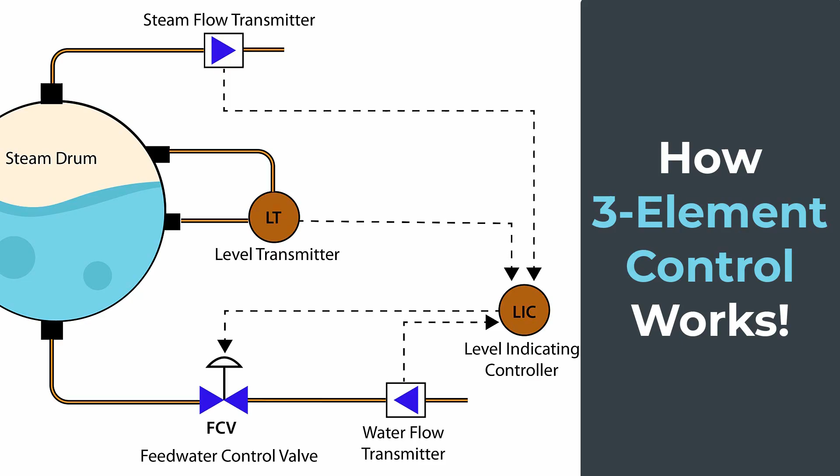In this video, we're going to be talking about three-element control and how we use it to regulate just how much feed water goes to our steam drum and correspondingly how much steam we're generating and discharging from the drum. It's going to be quite a short video because the concept is relatively basic. The idea is to give a brief overview of what three-element control is, why we need it, and how it works. We'll also discuss single element control and two-element control as a prelude to three-element control, and explain what swelling and shrinking, or shrinkage, means with reference to the boiler drum.

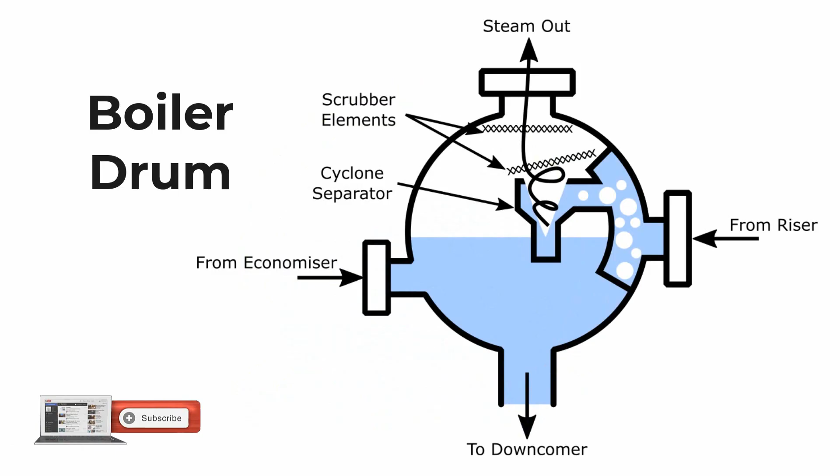Let's start by having a look at a boiler drum. We've got a totally separate video on the boiler drum, so be sure to check that out. It's a lot more detailed than what we're going to discuss right now, and it's definitely worth a watch.

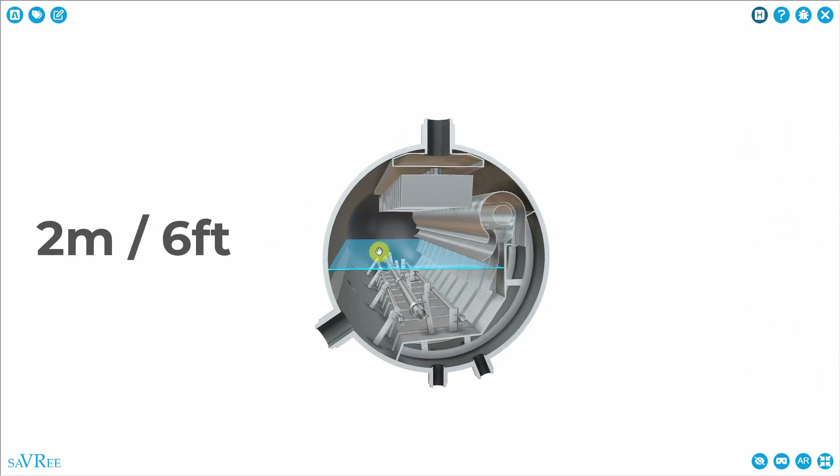Here is our steam boiler drum. I'll do a quick recap of the important bits relevant to this video. You can see that the steam drum is long and cylindrical in shape. It may be up to about 2 meters in diameter and up to about 30 meters in length. That's quite a large boiler steam drum.

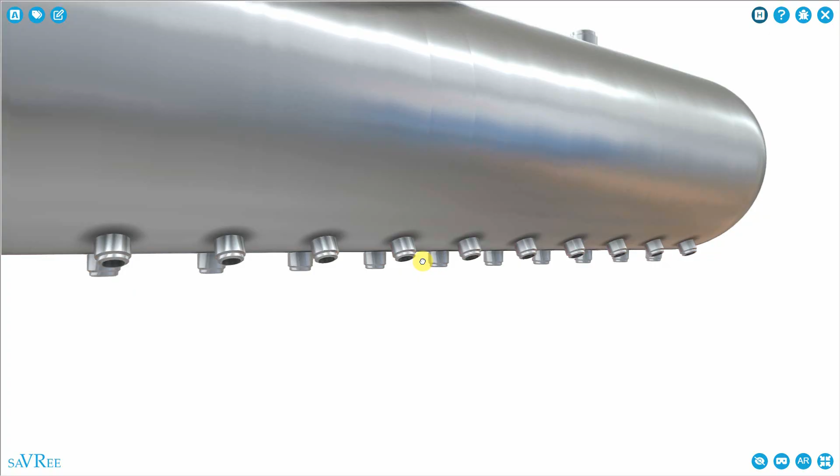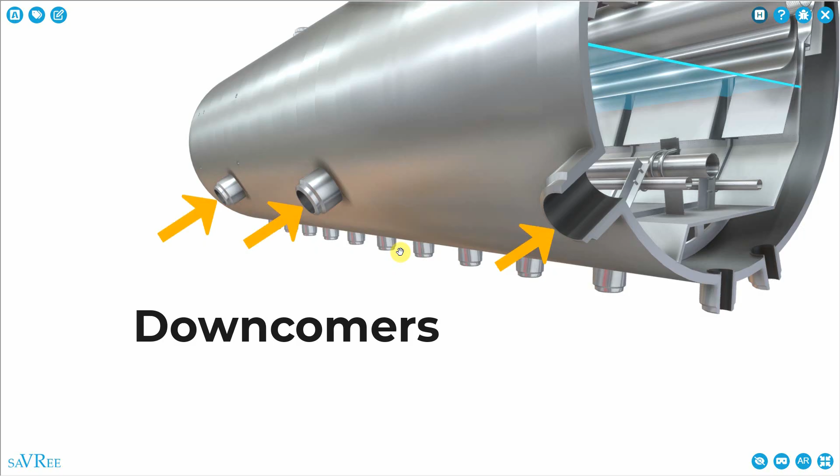We've got our steam discharges on top and our risers down below here. On the left side, we've got our downcomers. The downcomers distribute cold, or relatively cold, feed water to the boiler. That water will be heated up and then we'll get water and steam, a mixture of both, coming back up through these risers. We then separate the steam from the water in our steam drum and discharge the steam back to the boiler where it will be further heated, and we can then use that steam for driving a steam turbine.

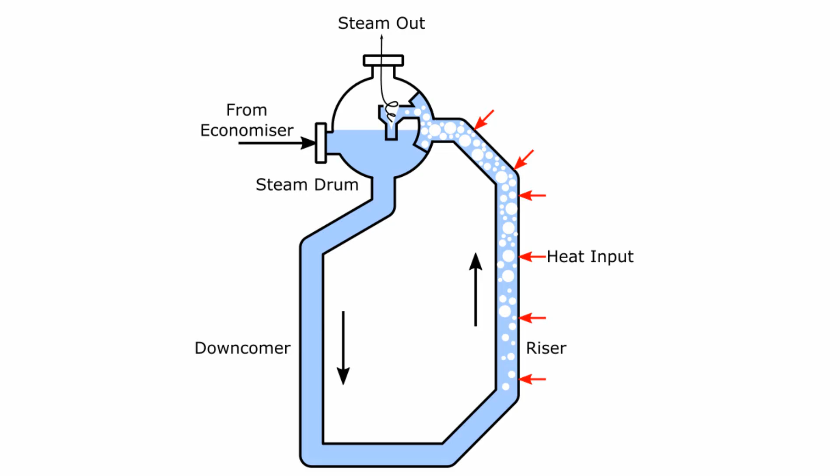That would be one application, but you can however use superheated steam for different applications, such as within a given process. The steam drum sits at the top of a water tube boiler. This one here is a water tube boiler that would be used within a power station. The steam drum is located at the top over here.

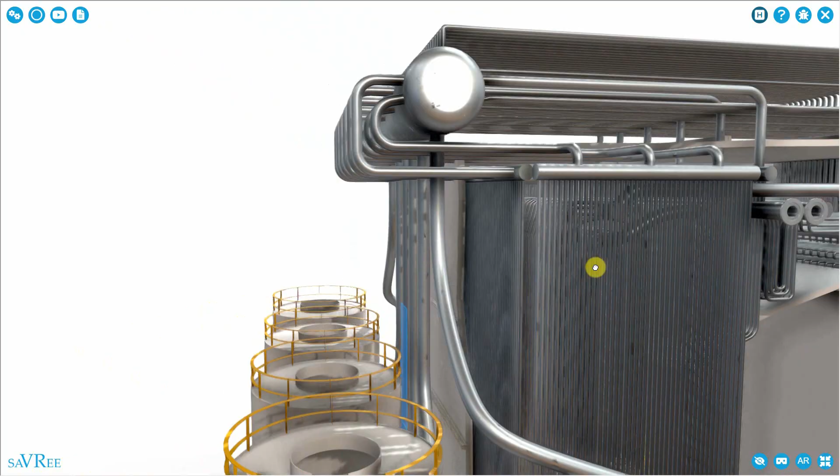This design is different from the one we've just seen. The downcomers literally come directly out of the bottom of the steam drum, and they'll go off to our furnace walls, to the boiler, and then the risers will come back here.

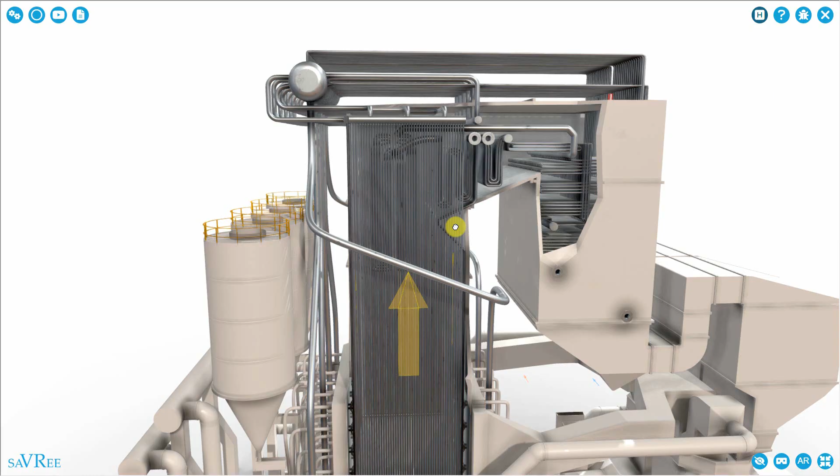So that's a short introduction to the steam drum. As I say, there is a detailed video concerning the steam drum, so make sure to check that out if you want to learn a bit more about it. This video focuses on three-element control, so let's move on to that topic now.

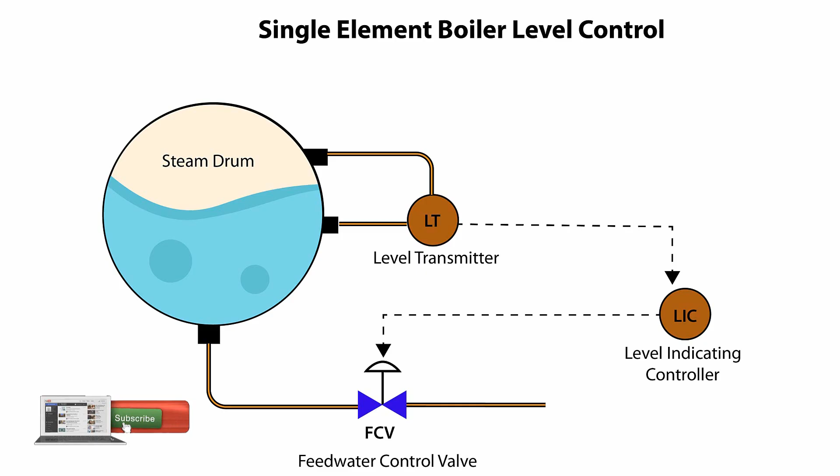Before there was three-element control, there was single-element control. The reason we're even discussing single element control is because the feed water had to be sent to the boiler steam drum at the correct flow rate. If we send too much boiler feed water to the steam drum, and here is our steam drum example again.

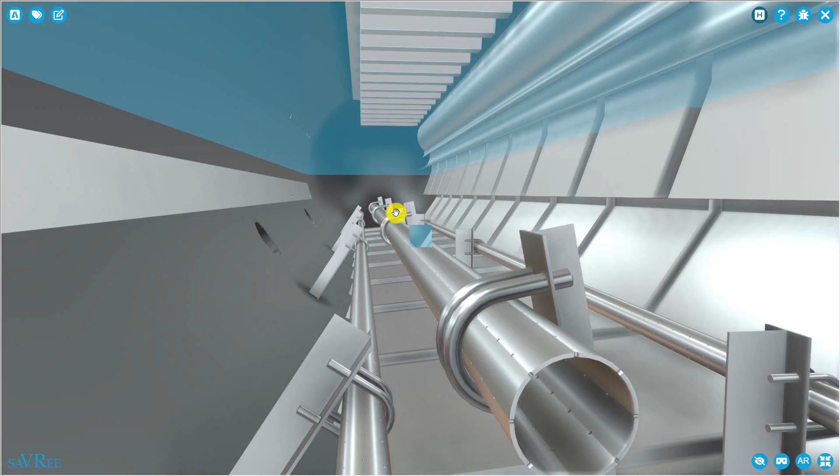The boiler feed water would come in through this pipe. You can see it's got holes all the way along. The feed water is distributed into the boiler steam drum. After being heated, we get our steam. It comes through this demister here and then out of the drum through the steam discharges.

If there's too much water, we're going to get water carryover, which will go through this pipe here, our steam discharge outlet. When we get that water carryover, we risk water hammer, we risk damage to our steam turbine blades, and we also risk that our heat transfer surfaces within the boiler become fouled. So we don't want that occurring. We want our steam to be clean, we want it to be dry. So that's a problem if we provide too much feed water to the boiler drum.

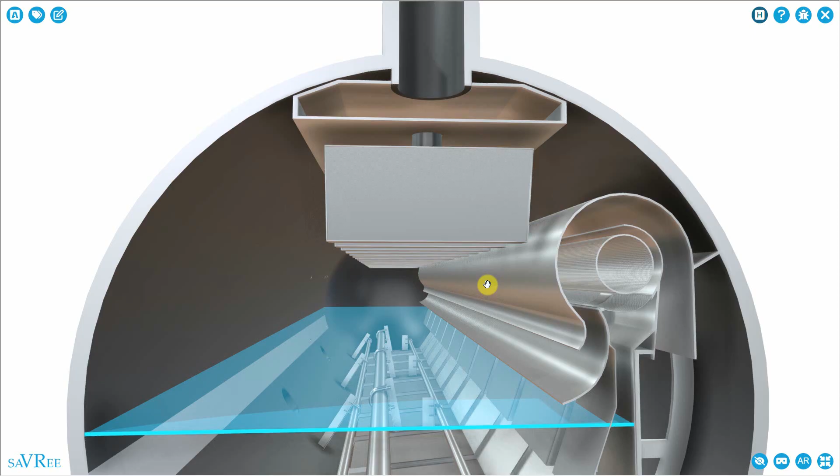If we provide too little feed water to the boiler drum, we're going to have a problem of a different kind. Then our downcomer pipes, here is one, are going to be starved of water. That means correspondingly, some of the tubes in the boiler will be starved of water. Remember, these are heat transfer surfaces. They may overheat because they're not being cooled down by the water. They may melt, they may rupture, and we don't want that either.

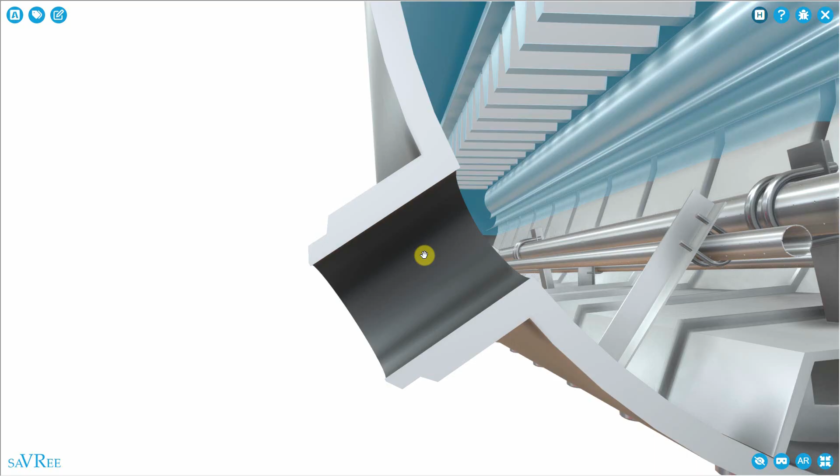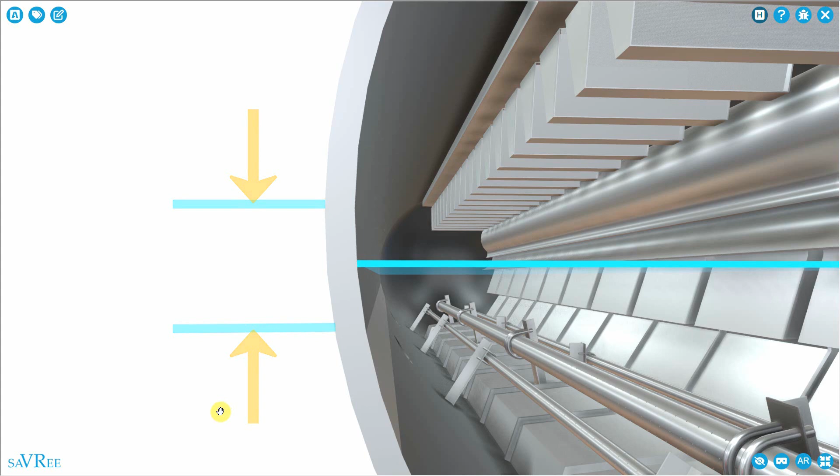So it's very important that our boiler feed water level stays within defined limits. As an example, it would stay roughly between where these two lines indicate now. This is actually quite difficult to achieve if you have a large boiler, multiple boiler feed water pumps, multiple loads, and large steam systems. Single element control is the most basic form of control used to regulate the feed water flow rate into the steam drum.

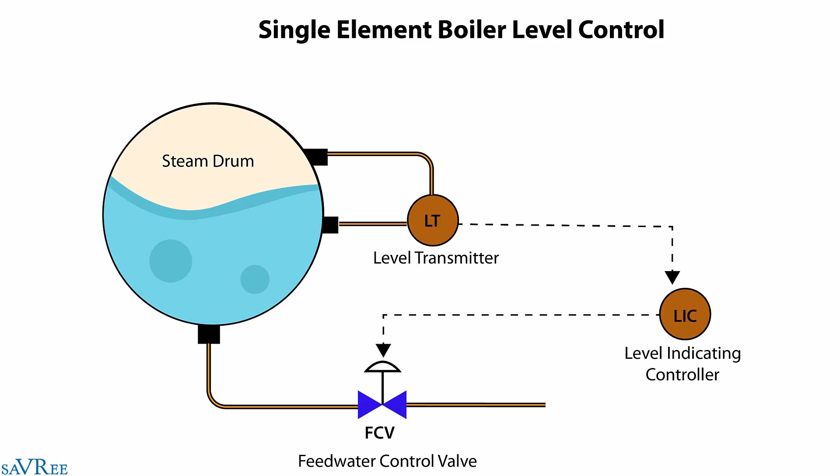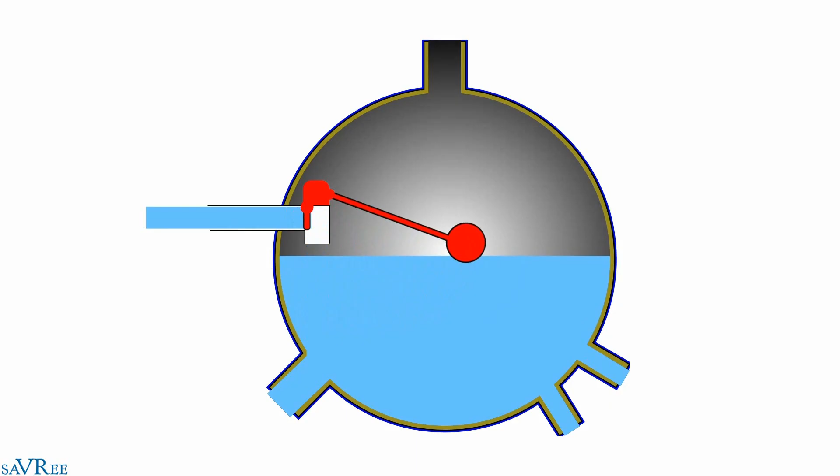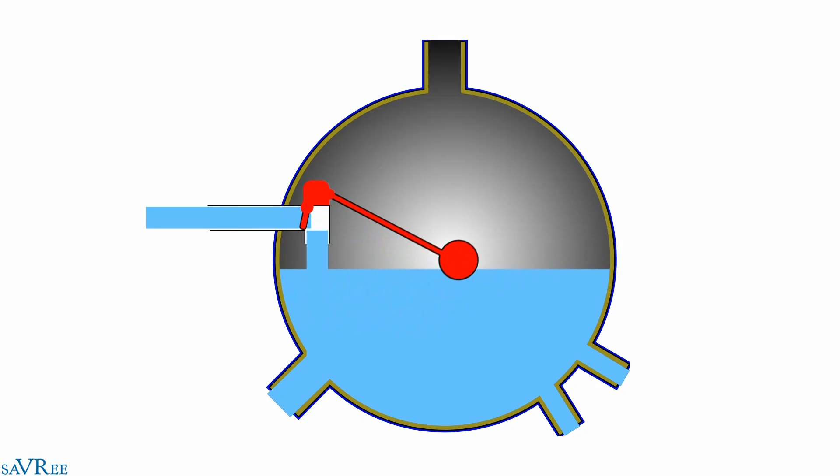To explain this as easily as possible, I'm going back to the first designs we used. Essentially we had a float within the boiler drum. The float would move up and down depending on where the water level was, and it would open and close a valve proportionally. If the level was dropping quickly, the boiler feedwater valve would open quickly. As the water level increased, the valve would proportionally close. This is called single element control because we're controlling the feedwater flow rate using a single element, which is a level transmitter or a simple float.

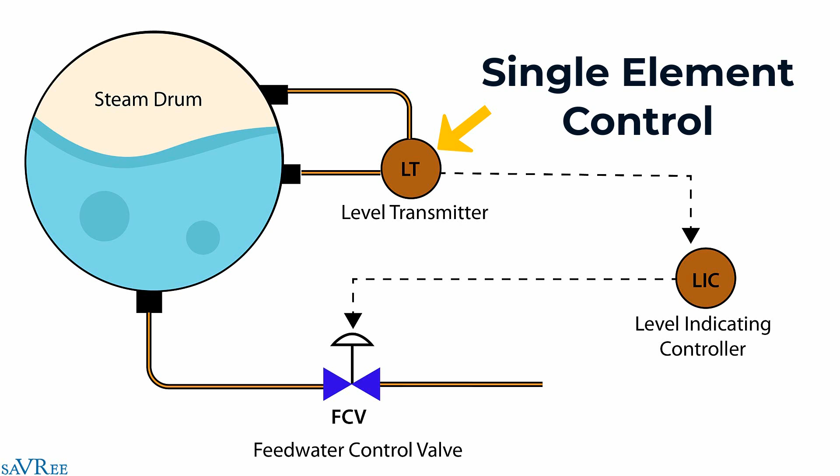Modern boilers, if they use single element control, will use a level transmitter, abbreviated to LT. The level transmitter sends an electrical signal to a controller, which then regulates the feedwater control valve to regulate how much feedwater is sent to the boiler drum. That is two element control.

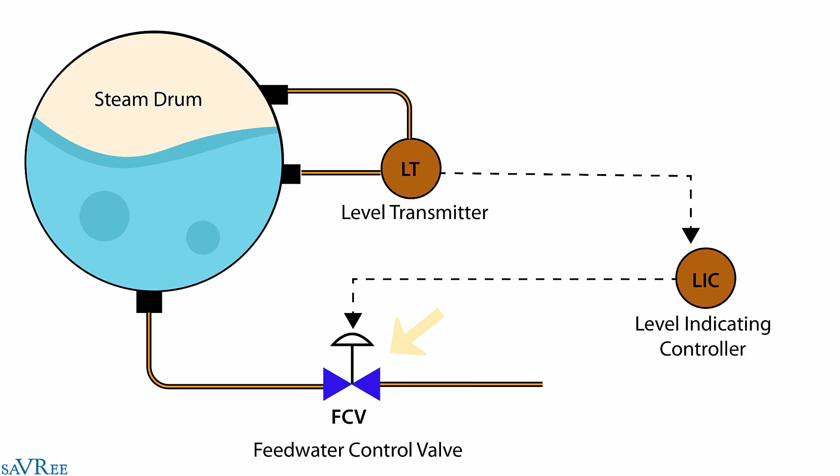What's interesting is that measuring the level is not enough. We also need to measure the pressure within the boiler steam drum, because the pressure within the drum causes the water level to change. A reduction in pressure causes the feedwater level to increase, while an increase in pressure causes the feedwater level to decrease.

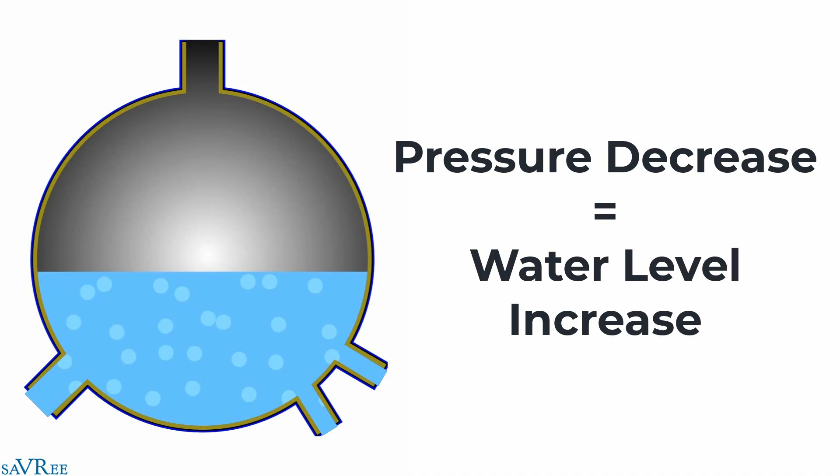Imagine we suddenly get a very large demand for steam, and this steam needs to be taken from our steam drum. We get a reduction in pressure, which leads to a corresponding rise in boiler feedwater level. So we're measuring a rise in boiler feedwater, which tells the feedwater control valve to reduce the flow of feedwater to the steam drum. The problem is that what we should be doing is increasing the feedwater flow rate - we should be opening the feedwater valve.

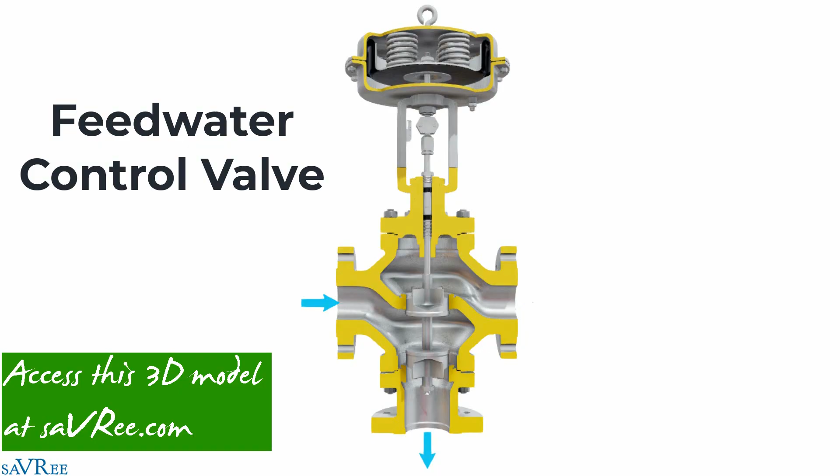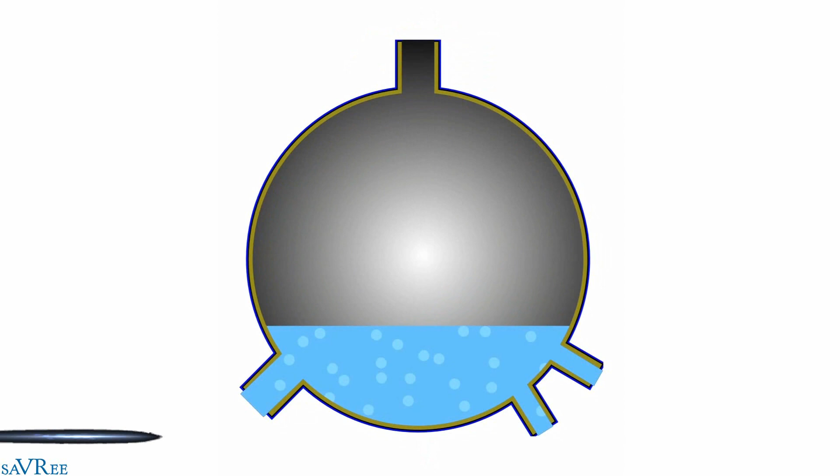So by measuring the level alone, it's not a reliable way to know the true level within the steam drum. We get this false signal because when the pressure decreases in the steam drum, the steam bubbles contained within the feedwater expand and become larger. This causes the level in the boiler steam drum to rise - it's not so much rising as expanding due to the reduction in pressure.

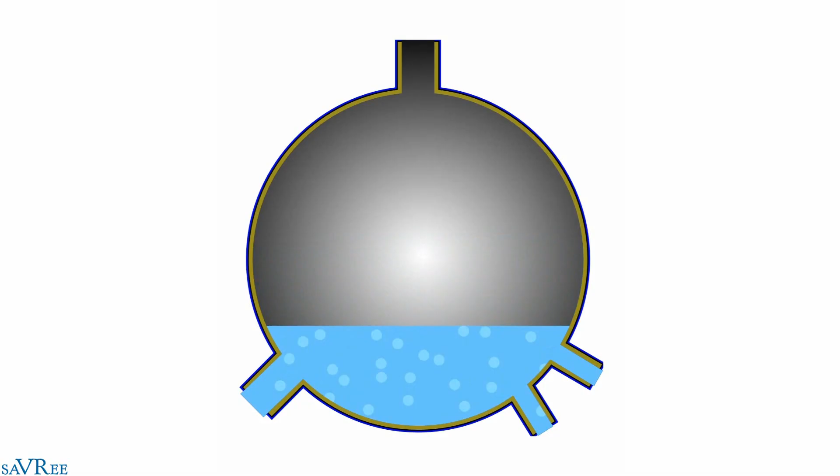But discounting all of that, what we've actually got is a false signal. It looks like the steam drum has a high water level, so we start to throttle the feedwater valve to close it - and that's exactly what we don't want to do, because this whole situation was only caused by a sudden large demand for steam. At this point we should actually be feeding more feedwater into the steam drum.

The situation I've just described, where we get a false signal and the water level increases, is known as swelling, or the swelling effect. The opposite of this, where the feedwater level in the steam drum decreases as the pressure increases, is known as shrinkage, or the shrinkage effect.

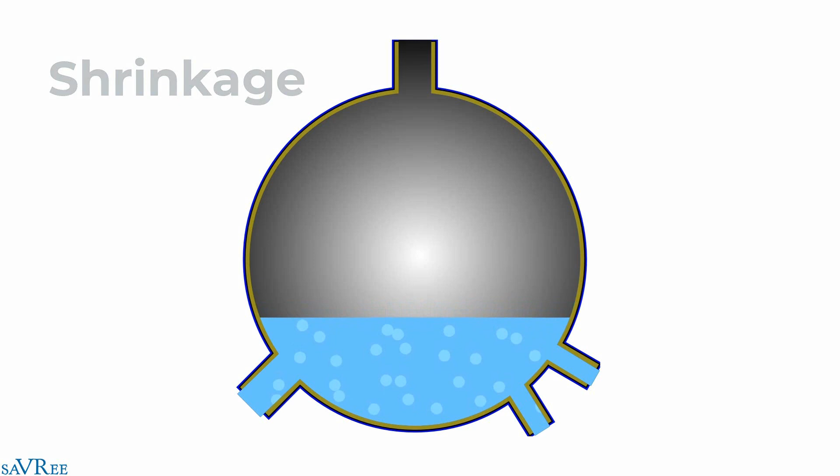So we must account for pressure in our steam drum if we're going to measure the level accurately. We have a level transmitter and a pressure transmitter, and we feed those two signals to a controller. The controller then throttles or regulates our feedwater inlet valve in order to supply the correct amount of water based on the level and the pressure in the steam drum. That is two element control.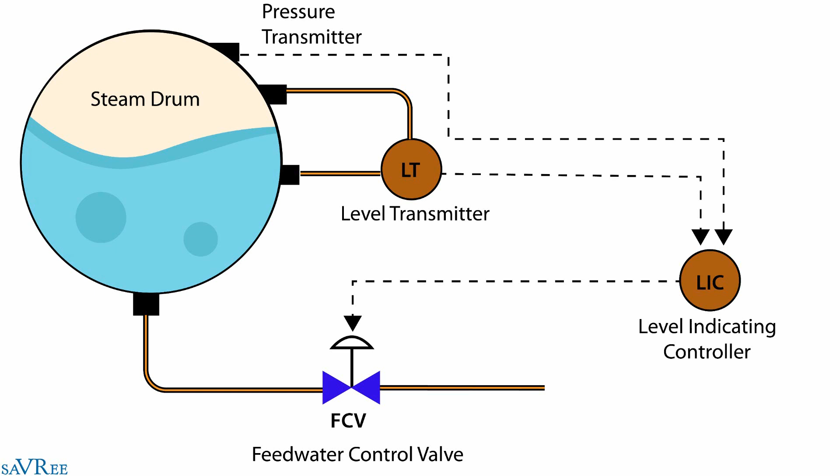Admittedly, when they talk about single element control, they discount the pressure transmitter - they only include the level transmitter and call it single element control. But if we want to go deeper into it, you really do need to measure the pressure in the steam drum in order to get an accurate reading.

Let's have a look now at two element control. It's similar to what we had before, but this time we're going to measure the steam flow rate, or mass steam flow rate, in addition to what we measured in single element control. So now we've got two separate elements of control: the mass steam flow rate and our level transmitter. The signals from our level transmitter and steam flow transmitter are sent to a controller, which calculates what position the feedwater valve needs to be in, and we take corrective action to adjust the position of the feedwater control valve. This gives us a much more accurate way of controlling the feedwater flow rate to the steam drum.

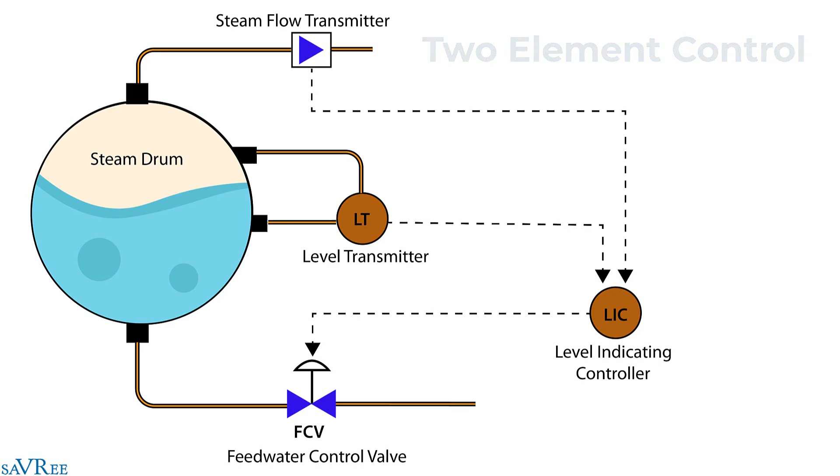3-element control goes a step further. In addition to measuring the level within the steam drum and the steam flow rate, we're also going to measure the water flow rate, or mass feedwater flow rate. This is 3-element control because we've got 3 separate points of measurement. Remember, there is also the measurement concerning pressure in the drum. Using this method, we can accurately control the feedwater flow rate to the steam drum and ensure that the level within our steam drum stays within defined limits.

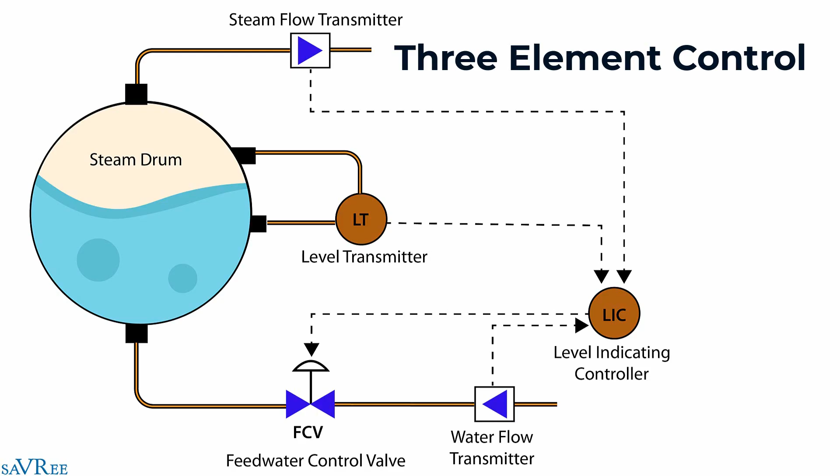It is not easy to keep the water level in the steam drum within defined limits if you're only using single element control. We have problems with shrinkage and swelling, and if we're using multiple boiler feed water pumps, turbine driven pumps, or steam loads that cycle significantly from high demand to low demand, and they do this quite frequently, it's very hard to keep that water level in the drum within defined limits.

You're dealing with all of the feed water going into the drum, and also the steam water mixture coming back into the drum from the risers during these cyclic steam loads. In addition, the feed water control system will often be connected to the fuel system of the boiler to regulate fuel proportionally with the feed water system. As an example, if we start supplying more fuel to our boiler, it makes sense that our feed water control valve should open more.

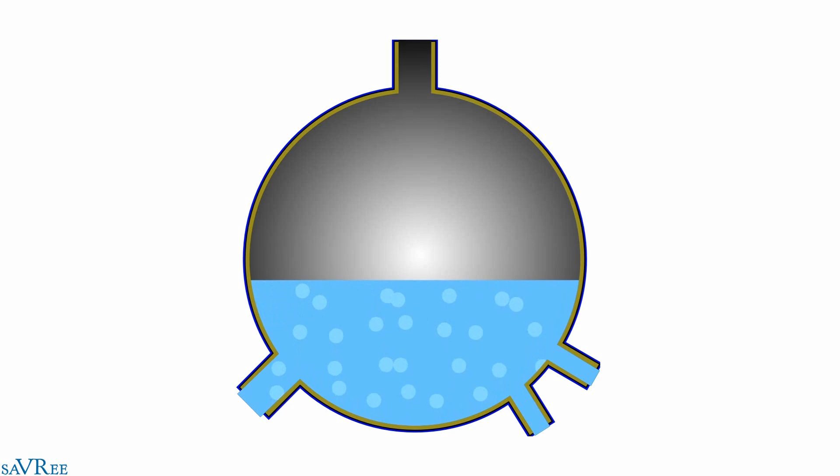A control system will know this and will be able to take inputs from the steam flow rate from our steam drum, our feed water flow rate, our level transmitter, and certain other pressures and temperatures around the system, and correspondingly regulate things like the fuel flow rate and the feed water inlet flow rate. So many factors here are used to control the level within our steam drum.

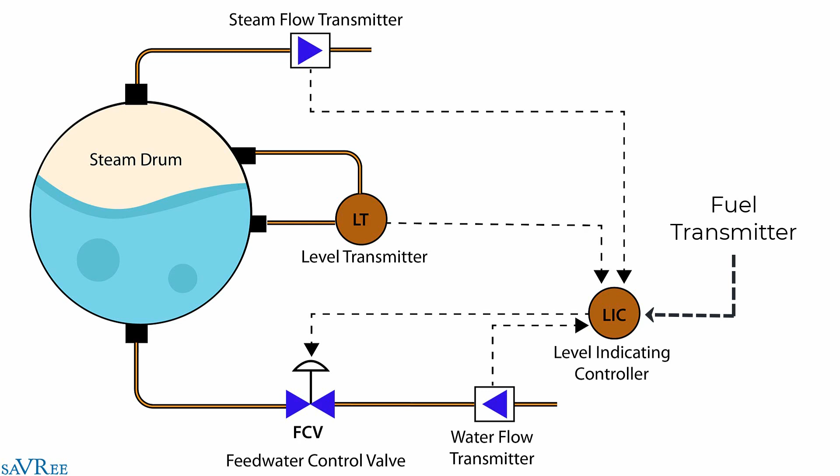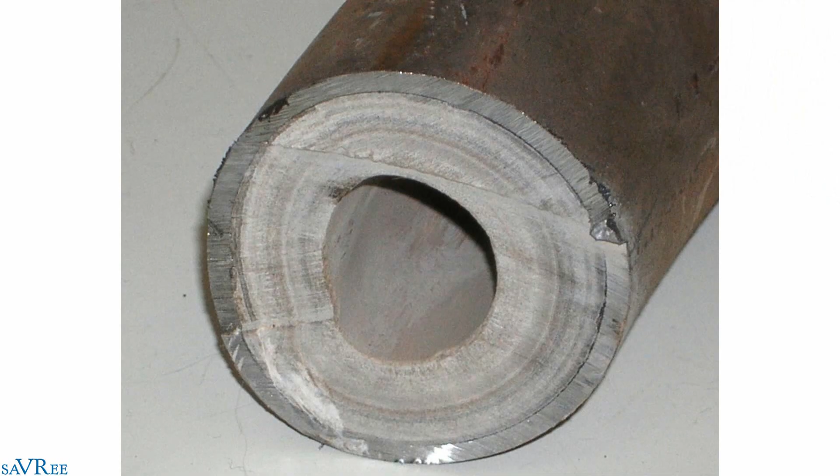But it's very important that the level stays within those defined limits, because any deviation outside of those limits could lead to damage on our heat transfer surfaces, pipes melting, pipes rupturing, water carryover to our steam turbine or processes, and water carryover to other heating surfaces such as the superheaters. This may lead to scale developing on the inside of our heat transfer surfaces, such as inside the tubing, which reduces the heat transfer rate for our tubes, gives us uneven thermal distribution across our heat transfer surfaces, and increases the likelihood that we damage our boiler tubes.

Irrespective of what kind of element control we're looking at, the best kind of control is one where we control the mass balance of the steam drum. We know what's going into the steam drum, we know what's coming out of the steam drum, and our feed water valve can be regulated based upon that.

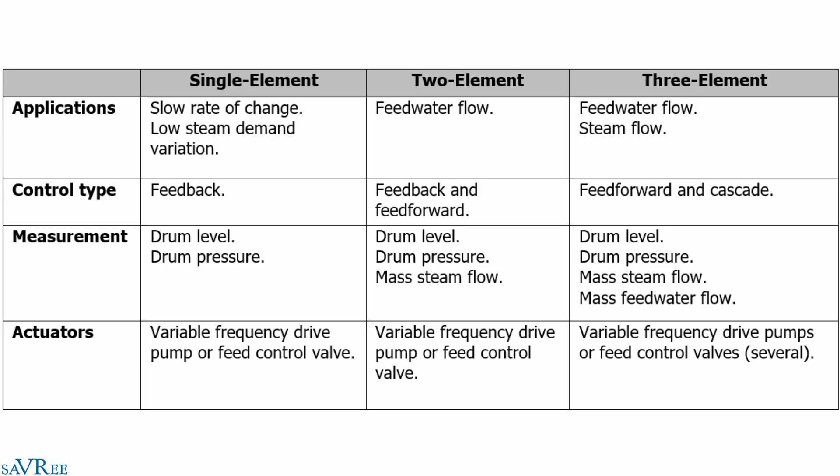A quick comment here concerning what element of control you'll use when you start the boiler. Typically you'll only use single element control. This is because the steam flow rate is unreliable when we start the boiler. There's no point measuring the steam flow rate at startup because the signal we're getting will not be very accurate. When the steam pressure and temperature is increased and we have a relatively constant steam flow, then we can switch from single element control to 3 element control.

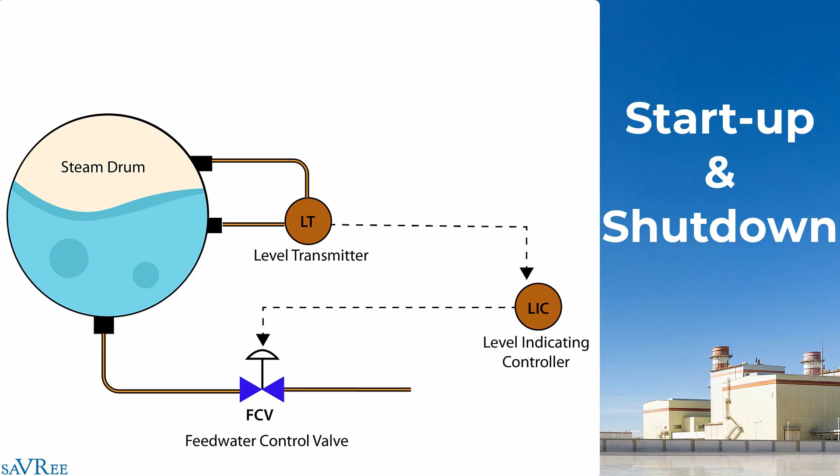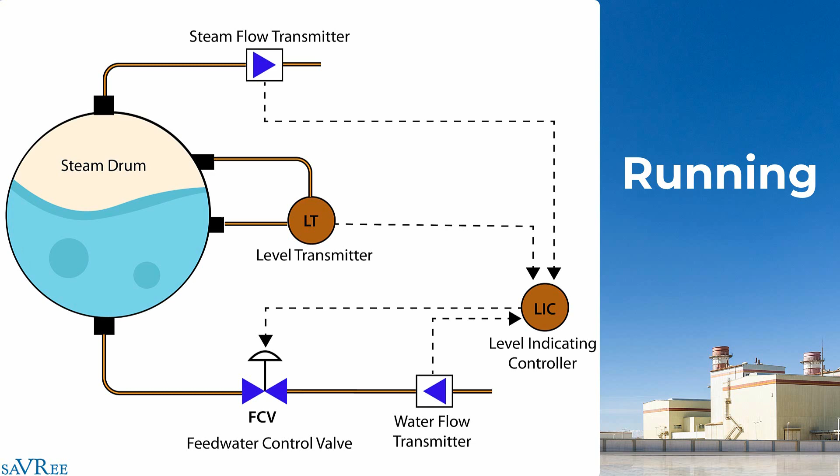The controller used for single element control and 3 element control will be the same controller, so we can do this seamlessly. We're not going to suddenly lose control for a second or two, it will happen instantaneously. Modern large boilers use 3 element control. You're not going to see single element control on a large water tube boiler.

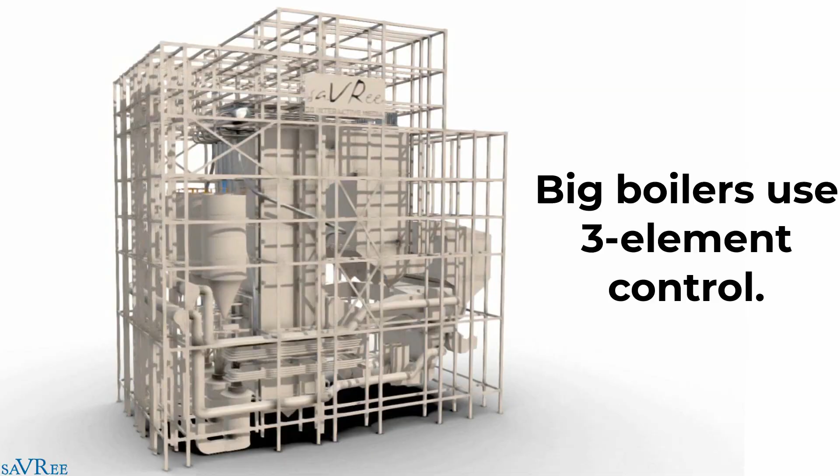Some very basic old water tube boilers, quite small, may only use single element control, but this really is the absolute exception to the rule. 3 element control is standard for large water tube boilers. It's the most reliable way to ensure that our boiler feed water level within the drum stays within the defined limits that we want.

Because it's so critical that the water level does not decrease or increase beyond those limits, manufacturers are willing to spend the additional money to install 3-element control. It's a safety feature and it is critical. Aside from that, it's also simply more efficient to operate the boiler with 3-element control than it would be with single-element control.